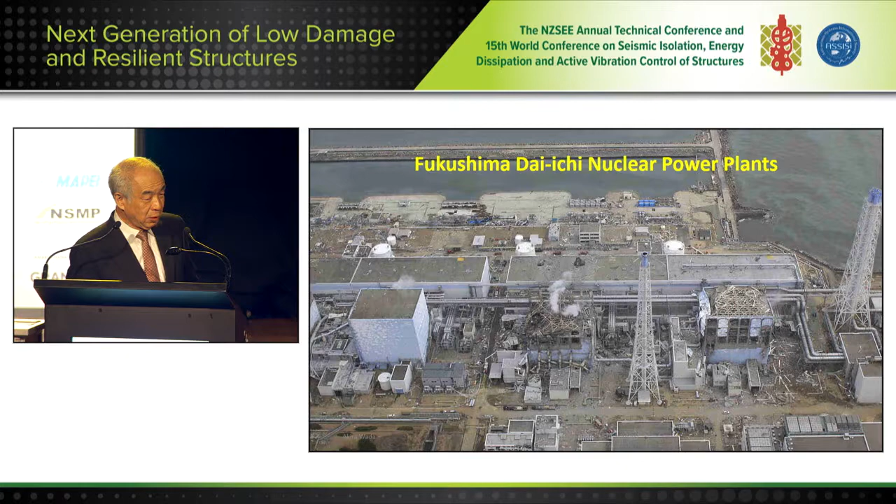Now more than 100,000 people cannot return to their hometown. What human beings did or do is always smaller than nature. But some people misunderstand that what human beings did is stronger than nature. This is a mistake.

There are many researchers and research fields - earthquake itself, active fault, building, or medicine - but we didn't discuss together over the fence. Nature is continuous, but human discussion has many gaps. This is the reason why the nuclear power plant broke down.

Let's start to discuss earthquake disaster from 1891. Japan opened to the world in 1867. Almost 23 years after Japan opened to the world, a very big earthquake hit around Nagoya city.

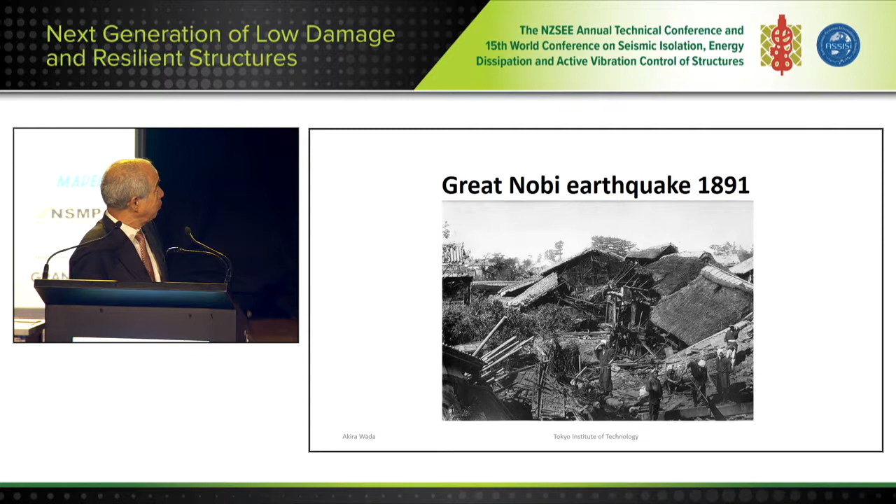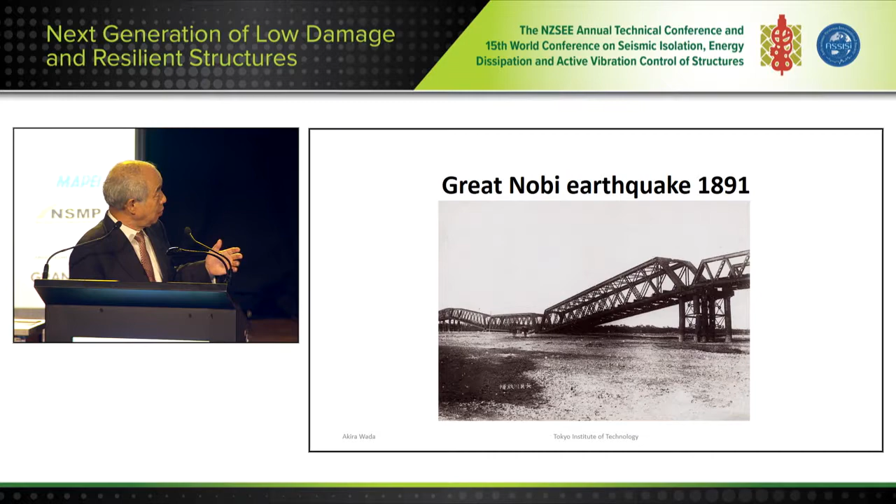These buildings and houses constructed before 1876 were very weak. And these bridges were designed by English engineers. But there is no earthquake in England.

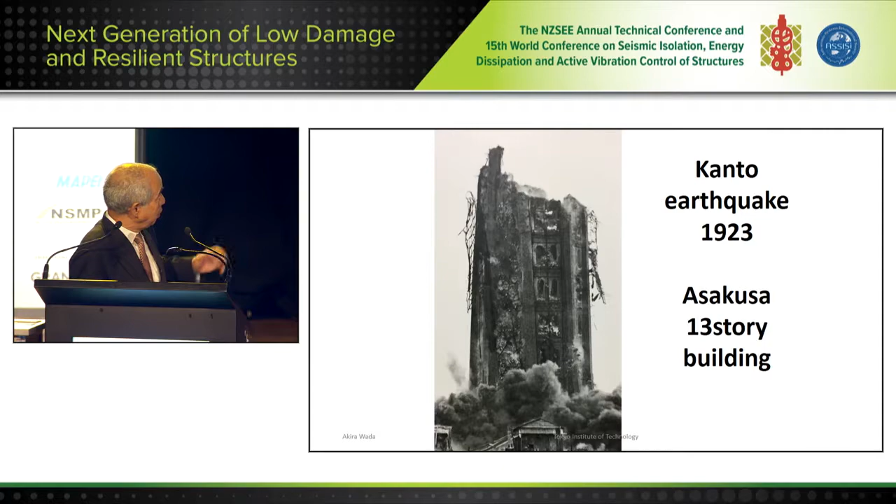In 1923, the Kanto earthquake hit Tokyo. Very severe fire came after the earthquake. Tall buildings of brick structure were very brittle. Many people brought their materials to the big park, but after that, a very severe fire came there.

All people were killed by the fire, and more than 100,000 people were killed.

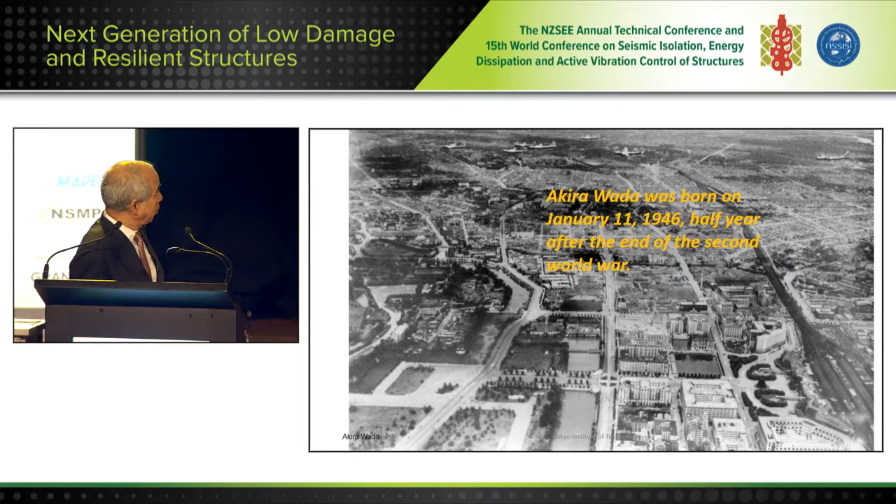I was born on January 11, 1946, half a year after the end of the Second World War. Almost all buildings were burned down by the Second World War. This war killed more than 3 million people. I think in China or other countries, more people were killed.

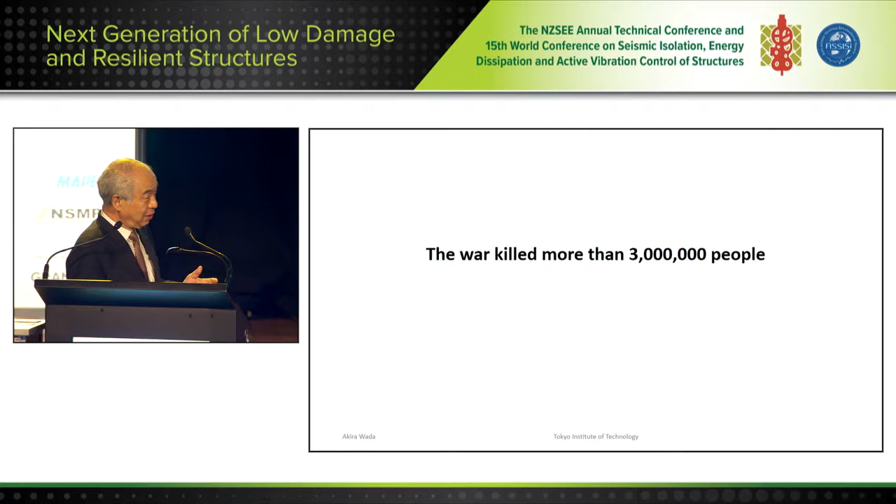Because of this I always say peace is important. 20 years after the Second World War, there was a strict rule that building height must be less than 31 meters. All buildings around downtown Tokyo were 31 meters in height.

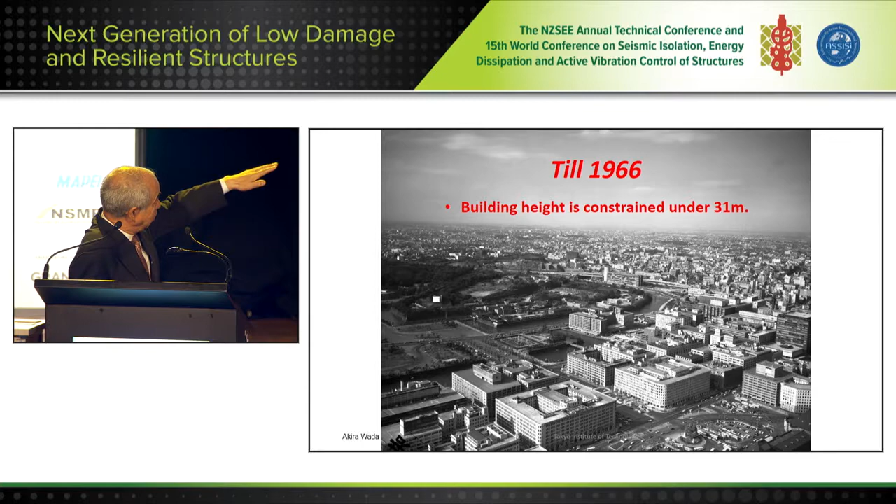In 1968, I was 22 years old. I graduated from university. The plate tectonics theory was approved, and the Tokachi earthquake happened.

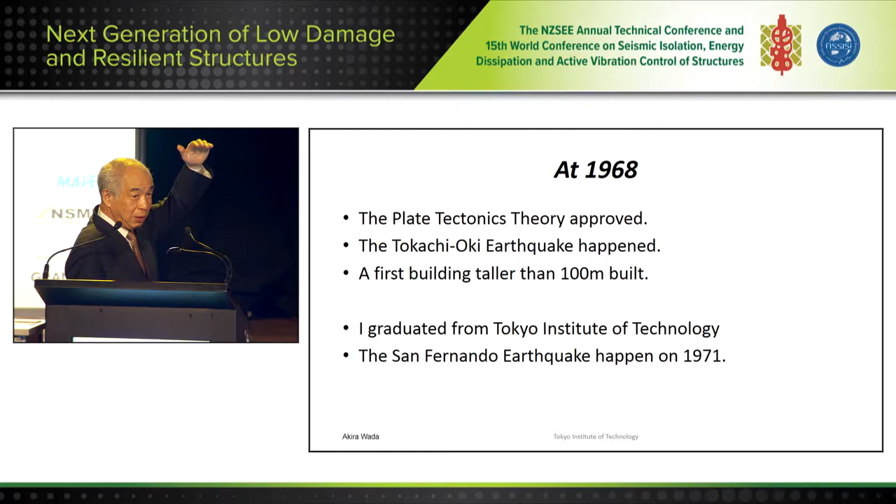There were many new reinforced concrete buildings built after the Second World War, but many reinforced concrete buildings collapsed. And the first tall building, taller than 100 meters, was constructed.

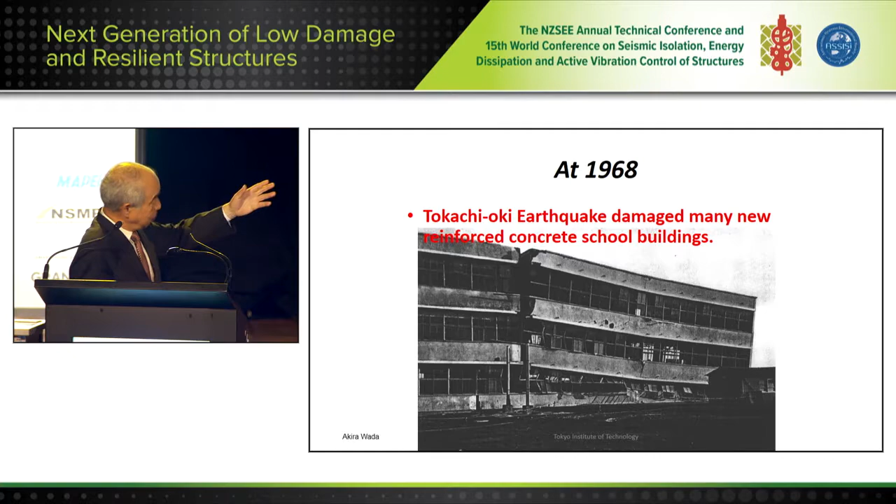The plate tectonics, as you know. This photo is not beautiful, but this building was very new at that time. But the hoop spacing - this distance is 25 centimeters. With very few hoops, shear failure happened in many buildings.

Also in the same year, the Kasumigaseki building was constructed. 1968 is a very important year in Japan, to me.

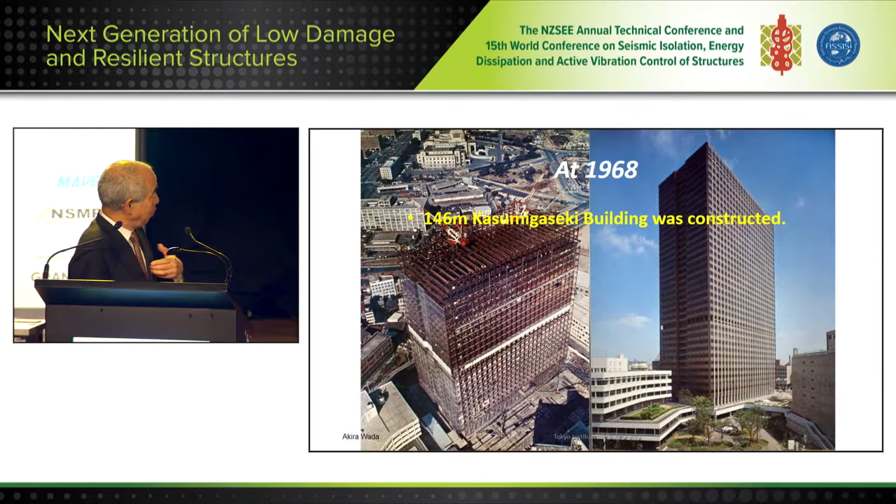Two years after I graduated from graduate school, I was a structural engineer at Nikken Sekkei, and our group developed this eccentric brace. Two or three years after that, Professor Takanashi visited University of California, Berkeley, and explained our research to Professor Popov.

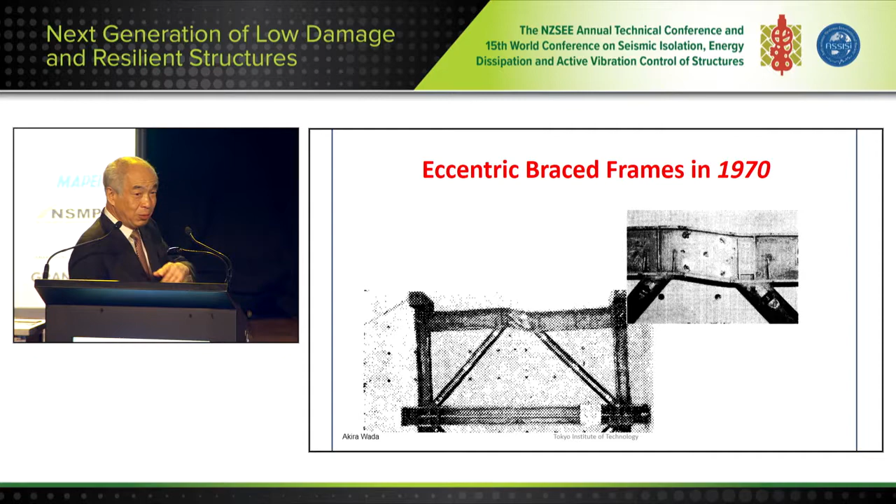After that, Professor Popov started this idea. I think none of them knew the original source - please remember this. The next year, the San Fernando earthquake happened.

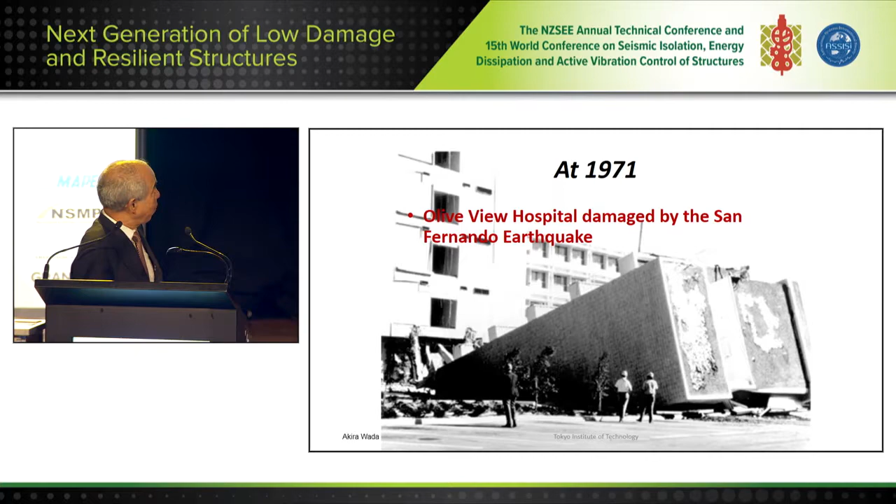In 1987, just 30 years ago, we developed buckling restraining braces with the engineers of Nippon Steel. This is the first set of 5 test specimens.

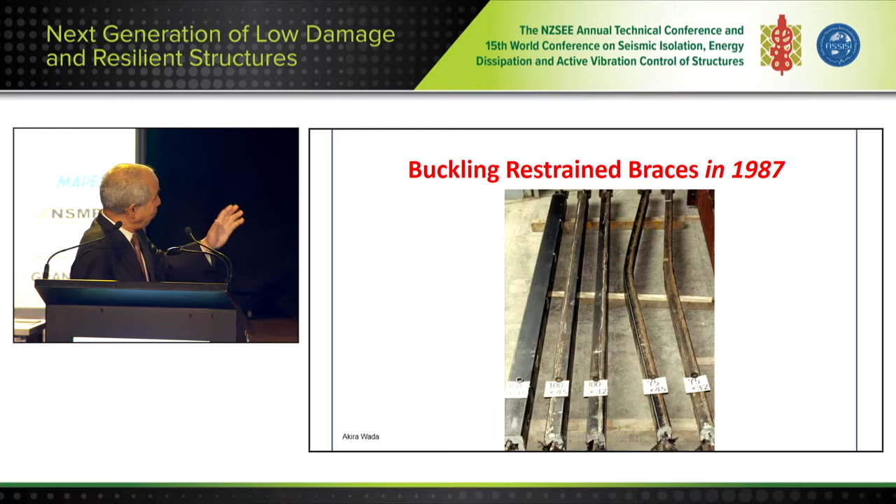The left side 3 specimens were not buckled, but the 2 on the right-hand side were buckled. The Euler buckling load is larger than the yield strength of the core member - 1.5 times stronger is okay.

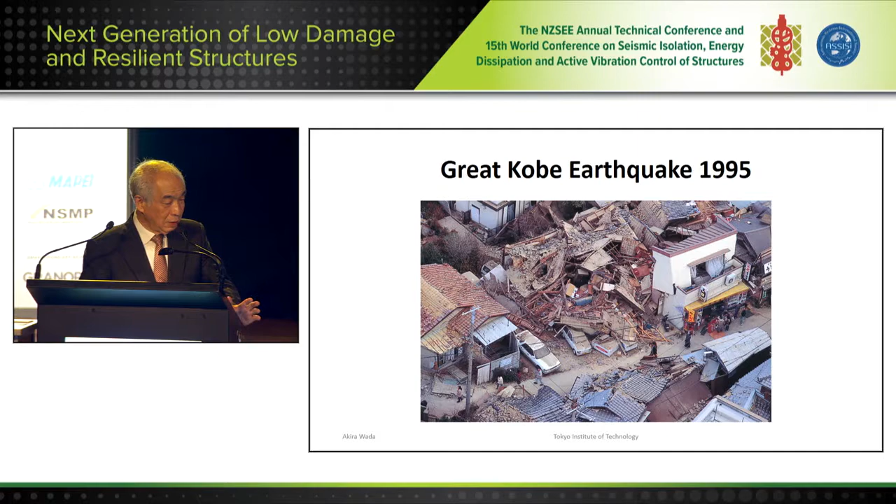Many old wooden houses were broken, almost same as 1891. And the reinforced concrete building, this building has no shear wall around the street, the torsional displacement.

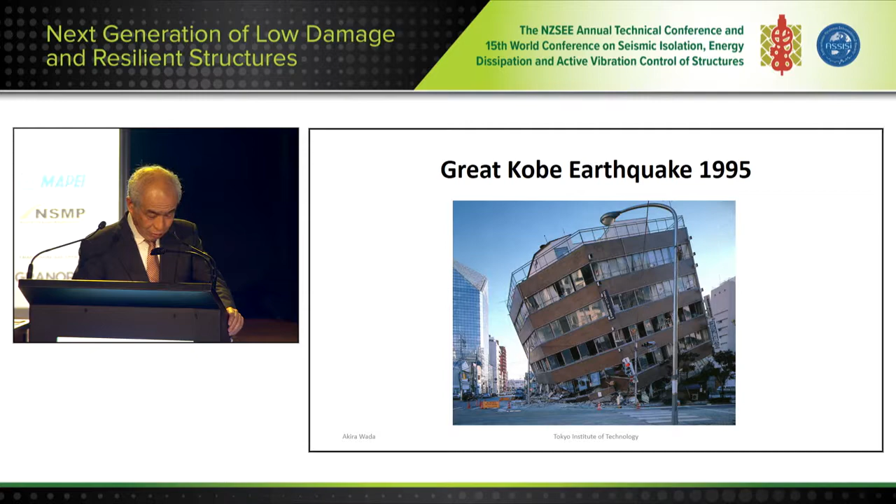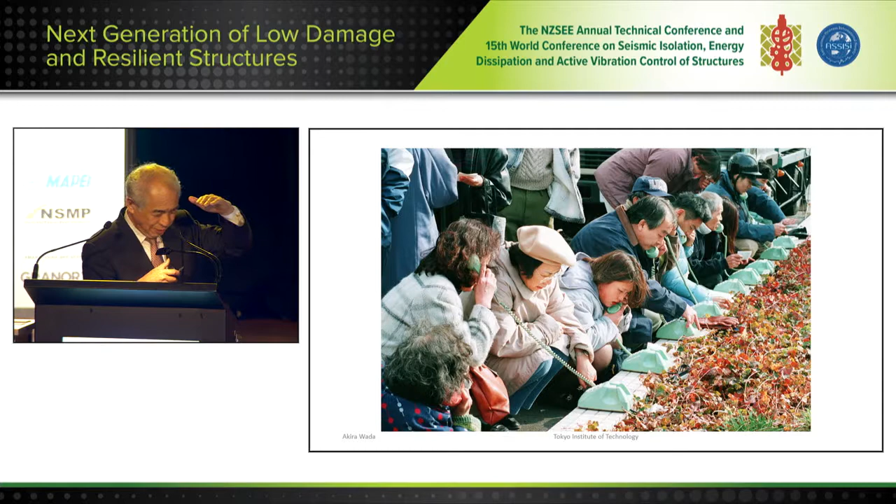And there are many brittle structures in Kobe. 22 years ago, almost all people did not have a cellular phone. The Japanese telephone company prepared a free phone; they called their relatives. But now we have cellular phones, traffic controls the telephone line, we cannot use it in the disaster area.

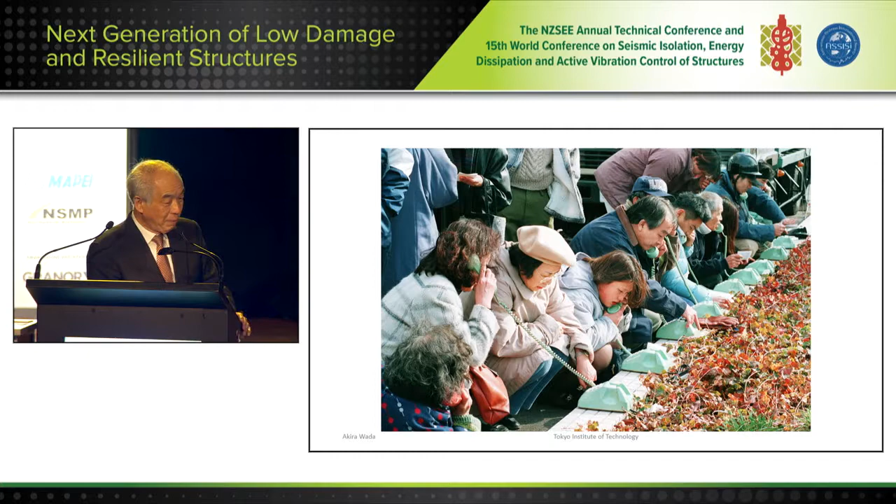And many garbage was produced by the earthquake. All trucks bring the structural materials.

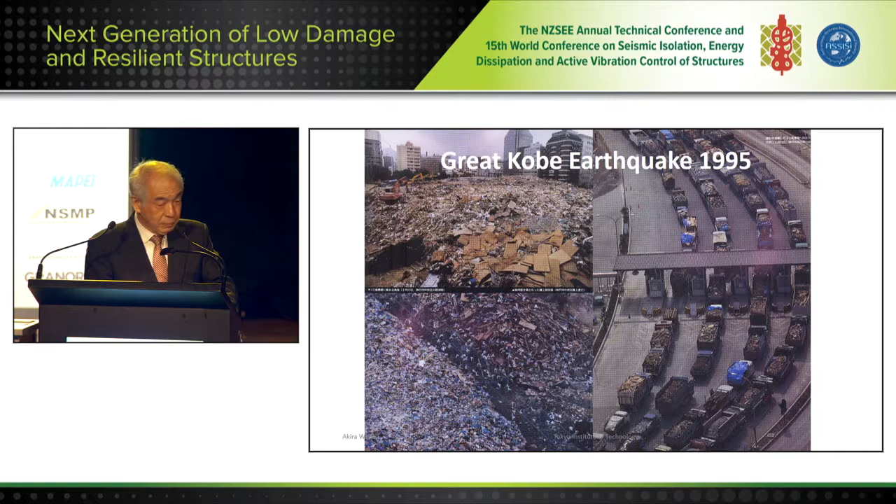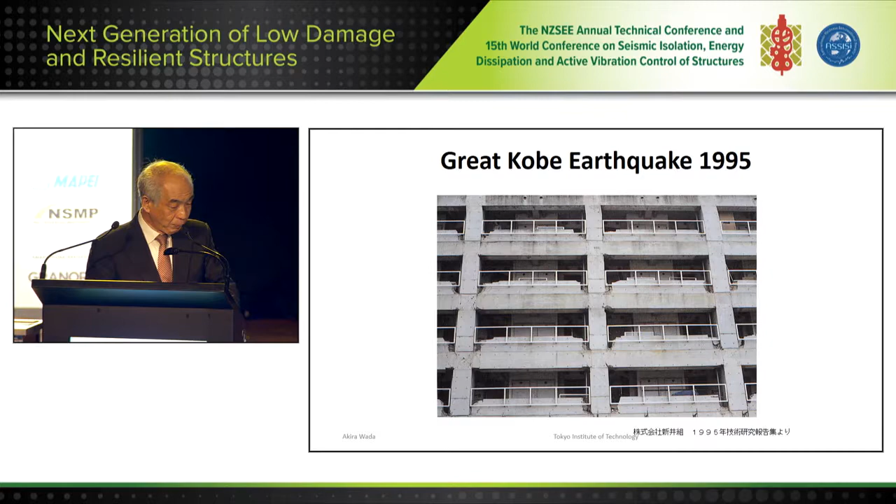This building, designed by the new design code, we changed in 1981, and this building is not so old at that time. You can see the bending crack, flexural crack, at both ends of the beam, and some X-shaped cracks in the joint. Second, third, fourth, fifth, sixth, seven. At the seventh is a roof beam, two beams and one column. So there is no crack in the beam, but crack happened at the top of the sixth-story column. And another story has many cracks around both ends of the beam.

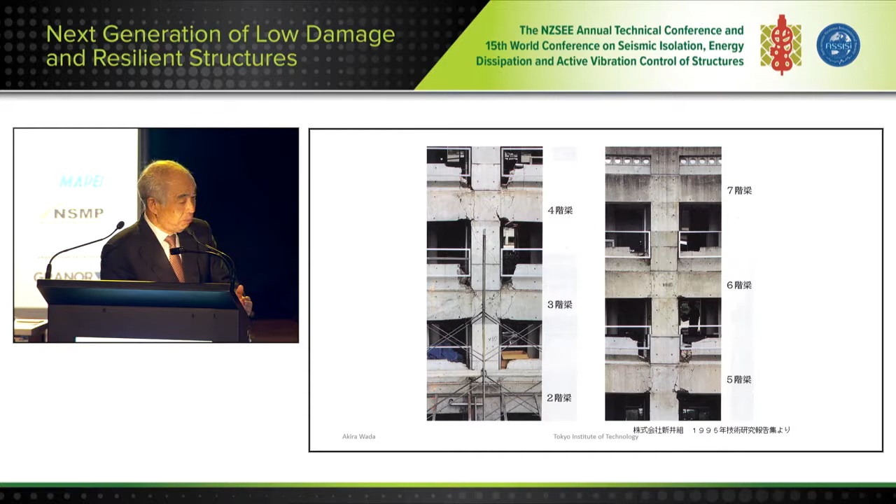This is expected by the researcher and the engineer. Perfect, no one killed by this building. But after that, they demolished this building, same as Christchurch 6 years ago.

And there are many buildings, some which have some damage, demolished. And the demolish money comes from the government. This is not a good system. If the owner has to pay the demolish money, they will make a more strong building. But in Christchurch, the insurance company pays, while in Japan, the government pays.

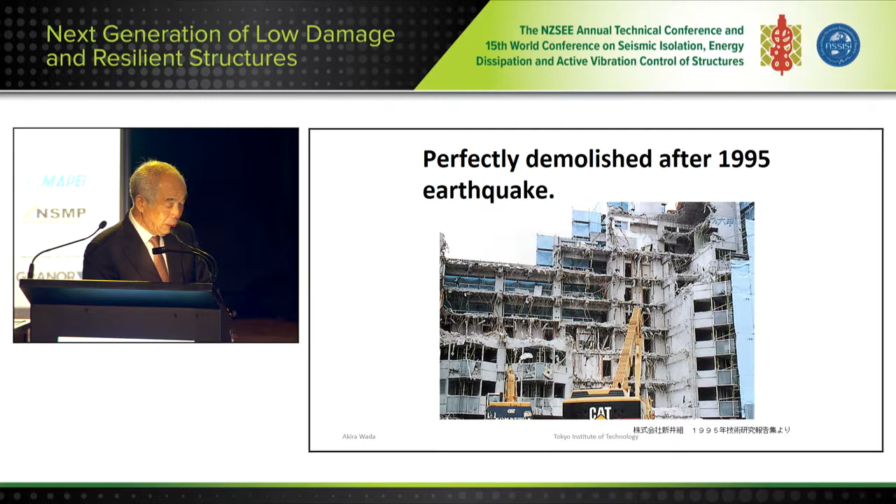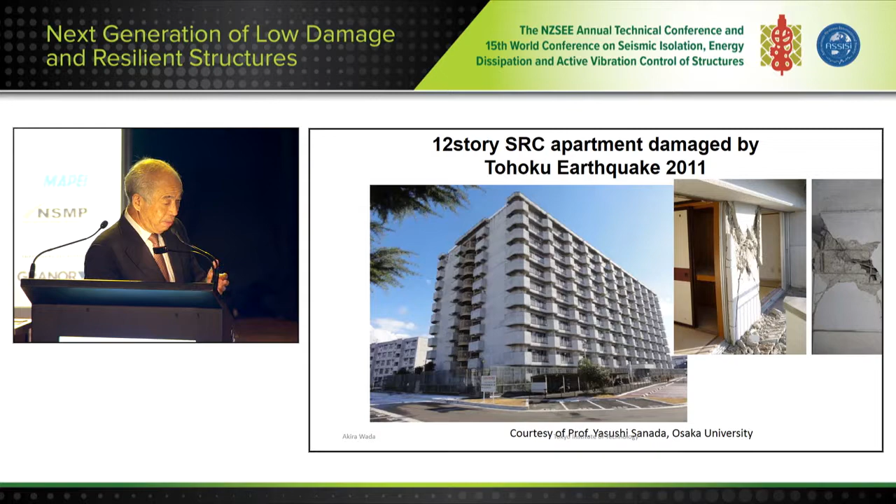During the earthquake, there was a very large sound. They don't want to leave this apartment after the earthquake. Professor Sanada checked all cracks around the building. X1, X2, X3, there are columns. Between X1 and X2, this is a little wider than the column depth. This is a non-structural wall. The non-structural wall has not much reinforcement, and it's a little wider than the column.

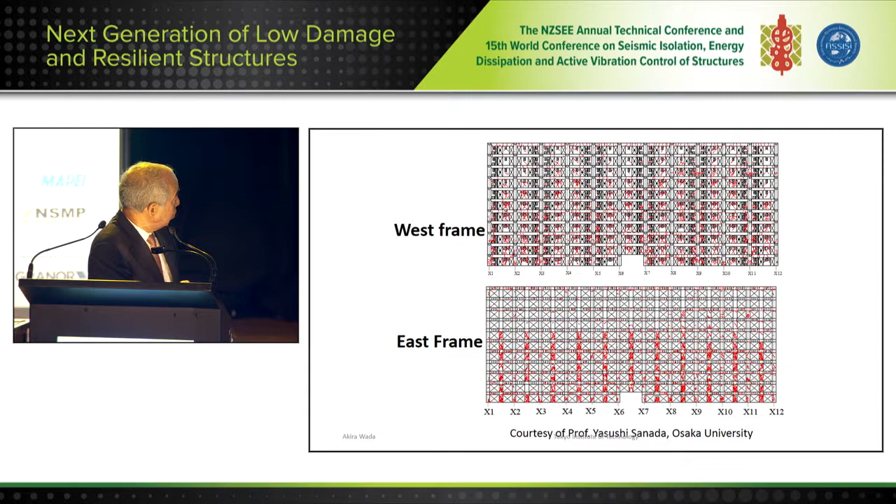Many cracks from the first, second, third, fourth, fifth, sixth, seventh story, but the column, from the first to third story, and there are many cracks in the beam - weak beam and strong column structure. In the west frame, there are many complicated non-structural walls with many cracks.

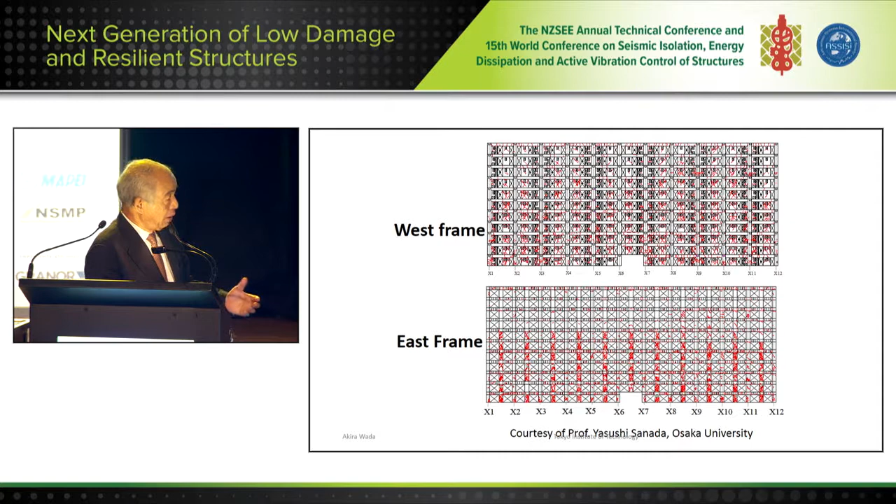And after that, this building was also demolished. The owner is Sendai City. Sendai City paid - this is okay. Sendai is about 400 kilometers north of Tokyo.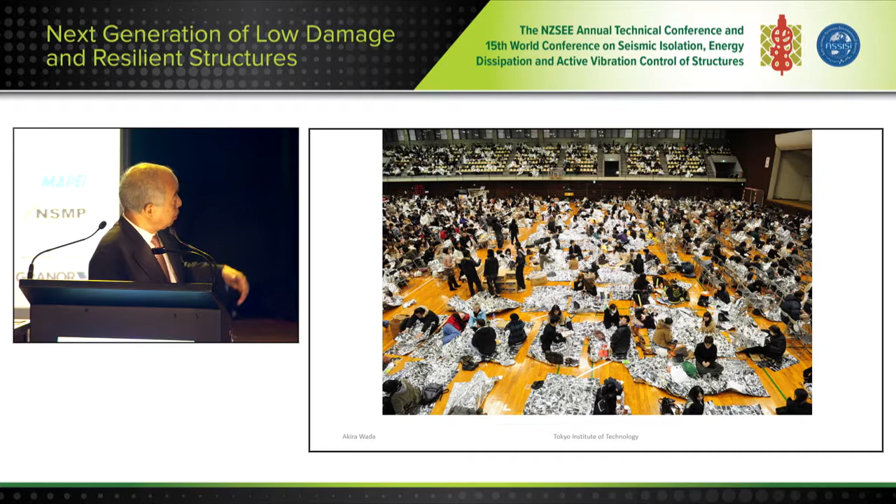This fire happened very close to Tokyo, very dangerous - an oil factory. And in Tokyo, many people were working, and they wanted to return to their houses, but many traffic and train systems stopped. They stayed in a gymnasium of the university. About 20,000 people were killed by this earthquake.

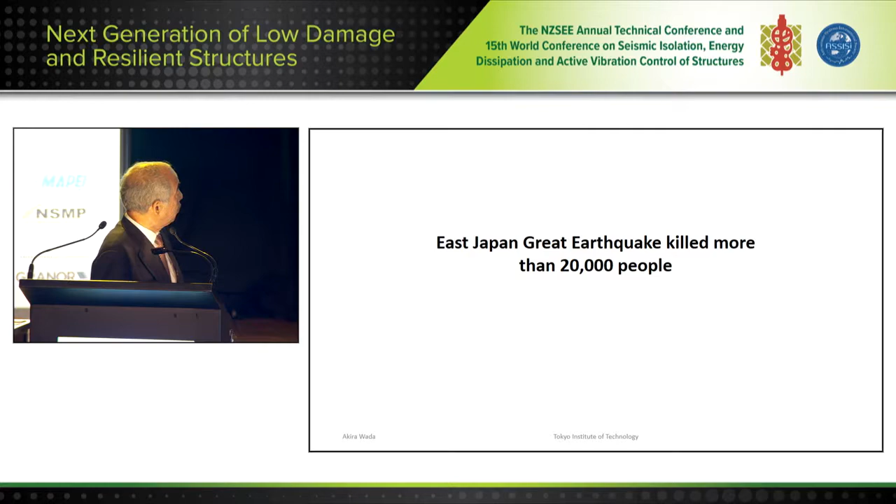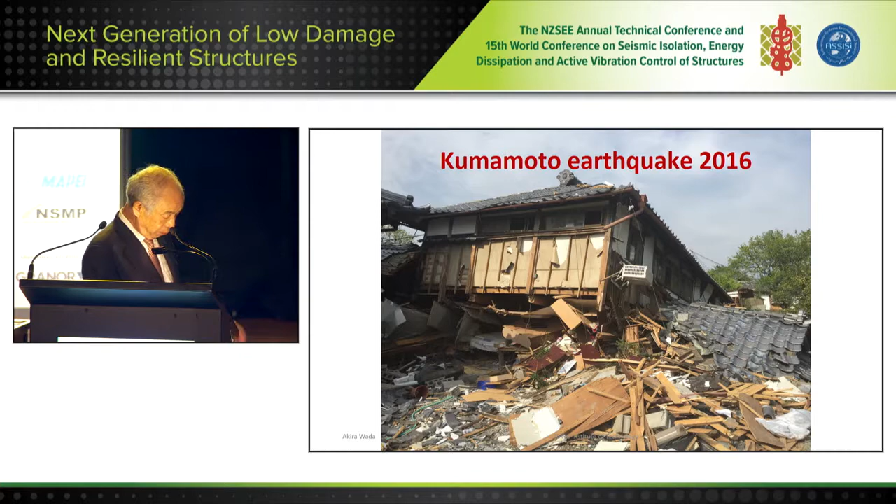Just 1 year ago, in the southern island of Japan, Kyushu, the Kumamoto earthquake happened. About 200 people were killed by this earthquake. I showed the wooden structure that collapsed in the 1891 earthquake, 130 years ago. But just last year, a wooden structure was broken, and a reinforced concrete city hall also broke.

This is a hospital with shear walls, not so big cracks, but the doctors and nurses didn't know if this crack was okay or not. This hospital has 300 inpatients, but patients don't like the furniture falling. So the doctor decided all 300 inpatients should be moved to another hospital.

Yesterday and the day before yesterday, you discussed not only structure but also function. But function will be okay, yet the people don't like to stay in this hospital. This is after they refused.

Two of them cleared the bed, but one person did not like to stay there. He refused just after the earthquake, did not clean up the bed. If you are in a hospital and an earthquake comes, please clear the bed and take it out from the hospital. This is a manner.

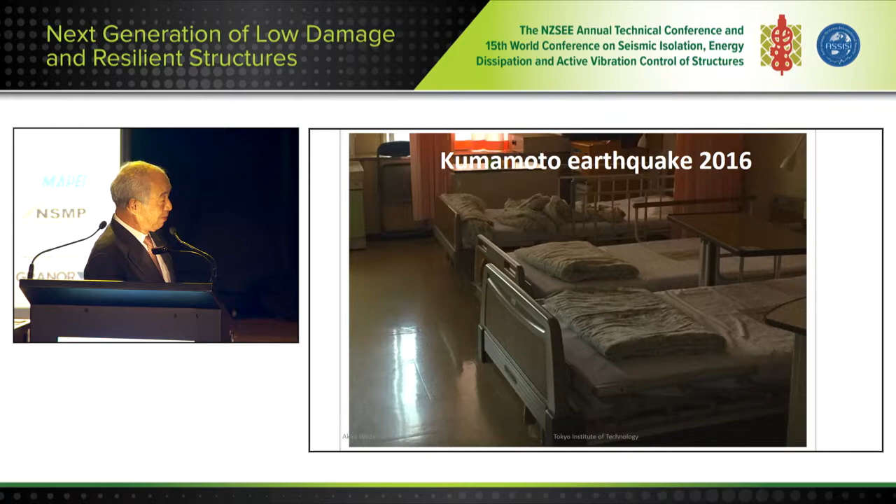And the next earthquake will come to Tokyo. When magnitude 7.1 or 7.3 comes, more than 23,000 people will be killed, and the collapsed buildings will number 610,000, and the total damage is 95 trillion yen, and the people who find it difficult to return home will be 8 million. I think the population of Christchurch is smaller than 8 million.

So, very... I cannot believe why many people are living in Tokyo.

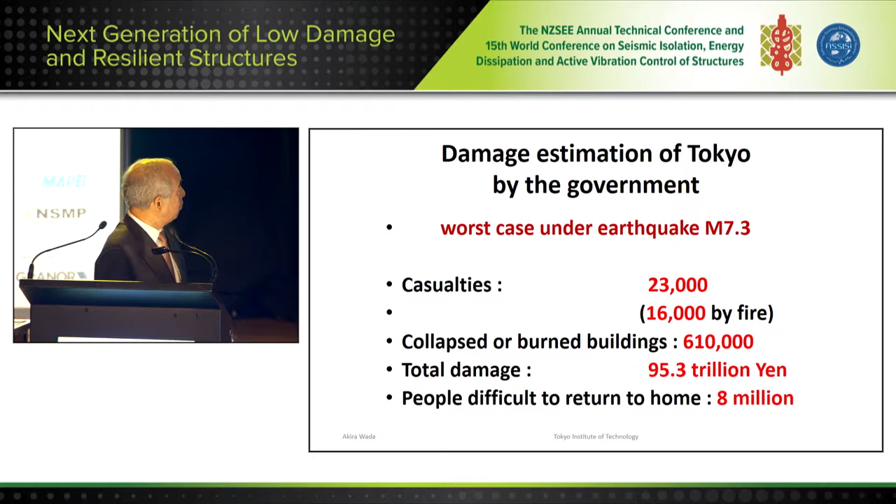Dark in the night. But in Tokyo, many people are living, and after the earthquake, electricity will stop. It becomes a perfectly dark city, very dangerous. There are many buildings, but not all are perfectly okay.

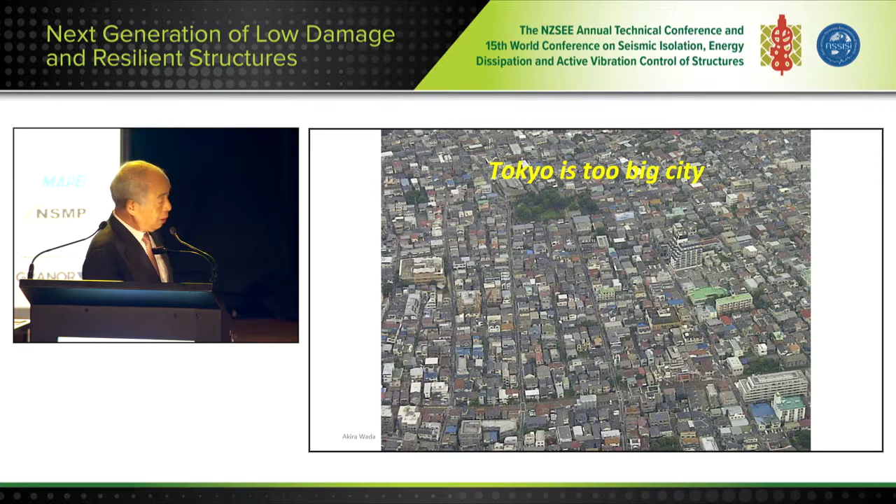And in the daytime, there are many tall buildings and the river. Sometimes it's not a big tsunami, but the tsunami will come.

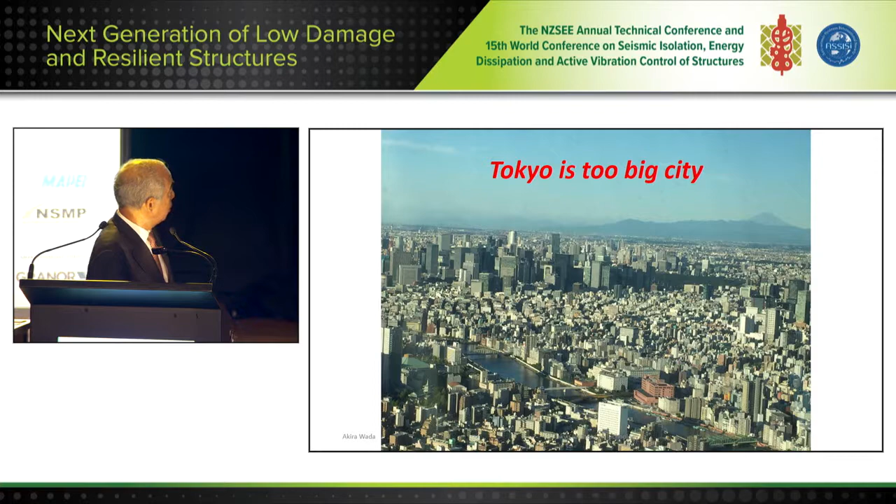But our seismic design procedure only ensures human life is safe. The building cannot be used after any repair. They want to demolish the damaged building, with no continuous use. But we cannot make our city sustainable and resilient against a big earthquake. We need to change our seismic design concept.

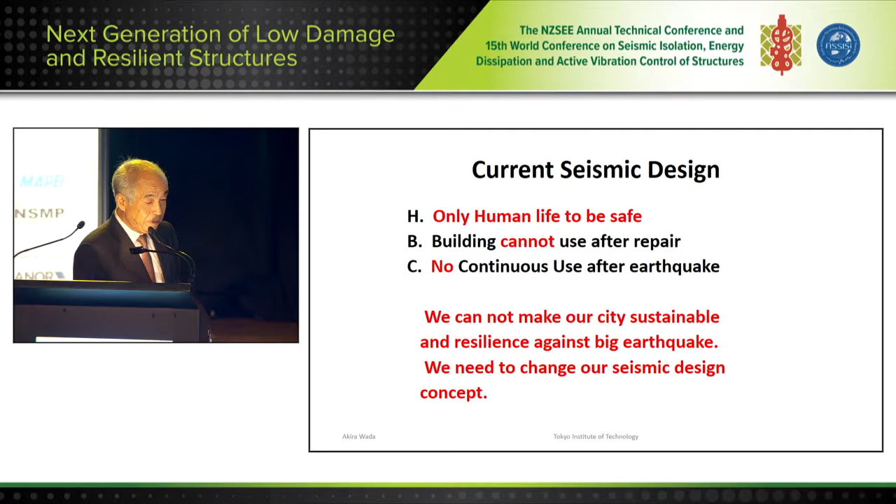This photo was given to me by Professor Steve Mahin, but Steve Mahin picked up this photo from the internet, so this is not legal. It's designed to protect life in an extreme event, but the damage is expected. The car design concept is okay this way: human life is okay, and he can buy a new car with the insurance money.

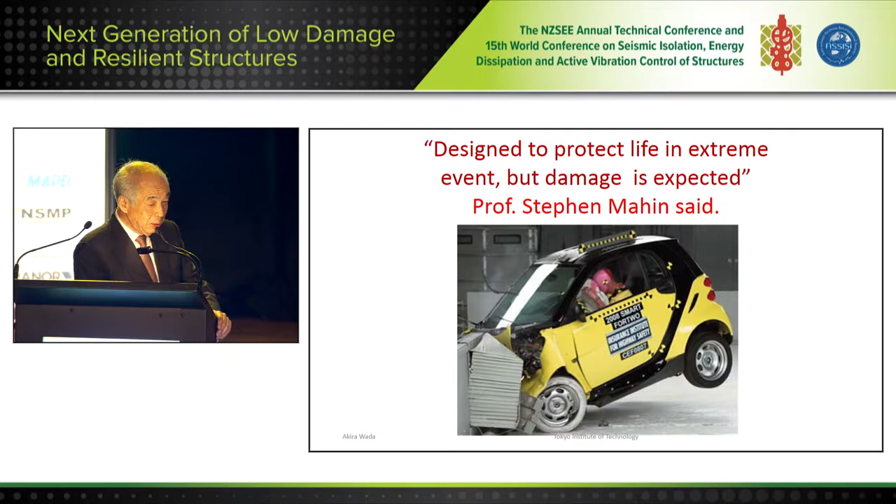But our seismic design concept is almost the same as a vehicle: protect life in a severe earthquake, but damage to so many buildings is expected.

Christchurch is the same situation. Two-thirds of the buildings were collapsed or demolished. I think this procedure is not good.

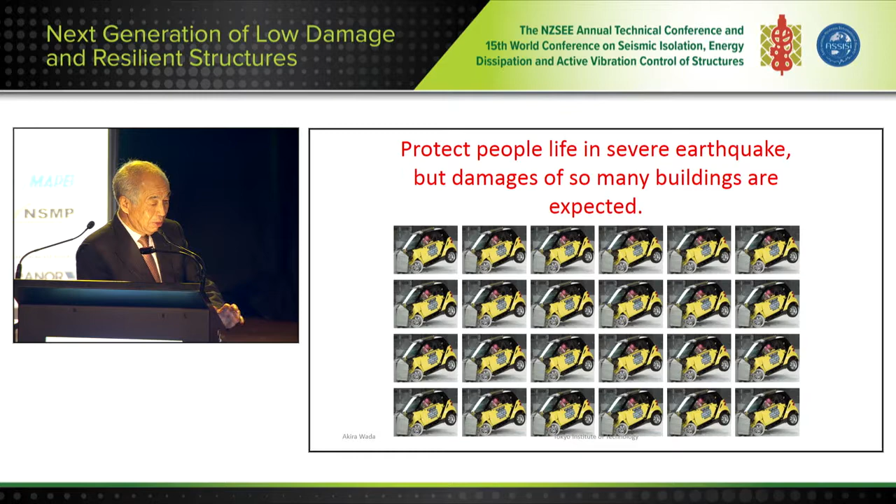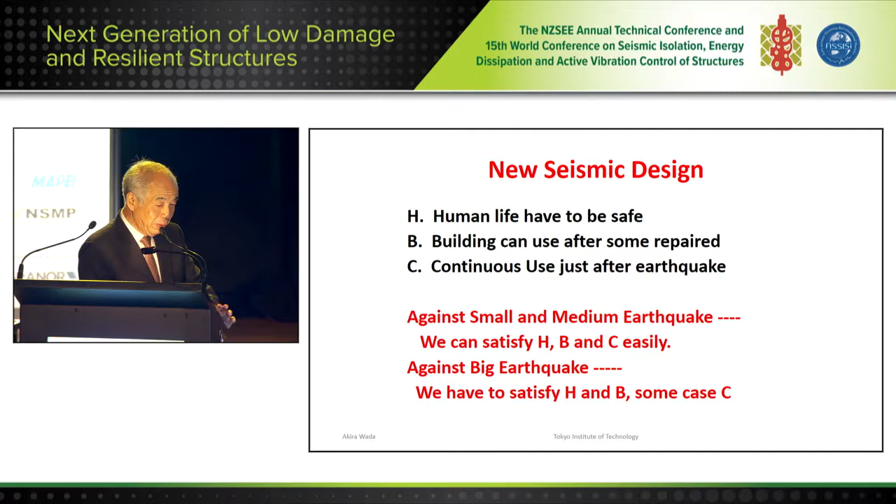Next, the new seismic design: human life has to be safe, that's okay. But the building can be used after some repair, with continuous use just after the earthquake for some buildings. Against small and medium earthquakes, H, B, and C easily. Against a big earthquake, we have to satisfy H and B. In some cases, we want to satisfy continuous use.

And we have many new technologies just discussed in this conference: seismic isolation, passive control, stepping columns, and the elastic joint of precast concrete structures. In this conference there are many new young researchers, and they will make even better systems.

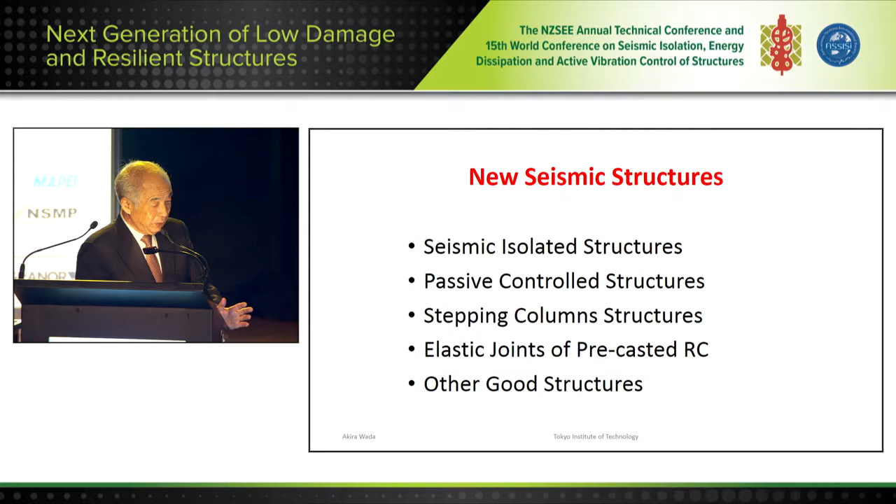1,300 years ago, the Shosoin was built. This building is supported by 40 timber columns. These columns stand on large stones, and the column does not go through the building, it stops beneath the building.

The height is 2.3 meters, and the diameter is about 60 centimeters, and the stress on the column is very small. When an earthquake comes, the column rocks like this, and the superstructure will move in any direction, almost the same as a friction pendulum.

And in these 1,300 years, there has been no earthquake damage. This is one of the originals of seismic isolation.

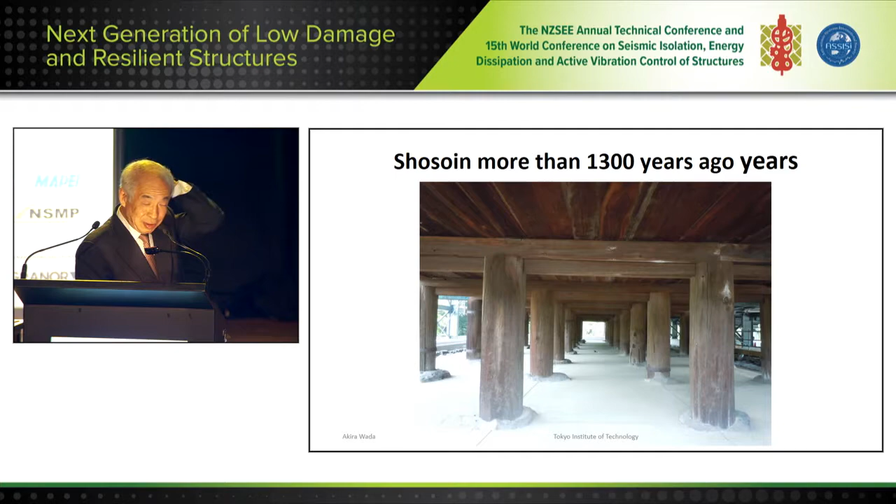The day before yesterday was about the history of seismic isolation, which is older than this. But 1,300 years ago there was no internet, so this carpenter didn't know what the Turkish people or Iranian people did. I think all this technology was original.

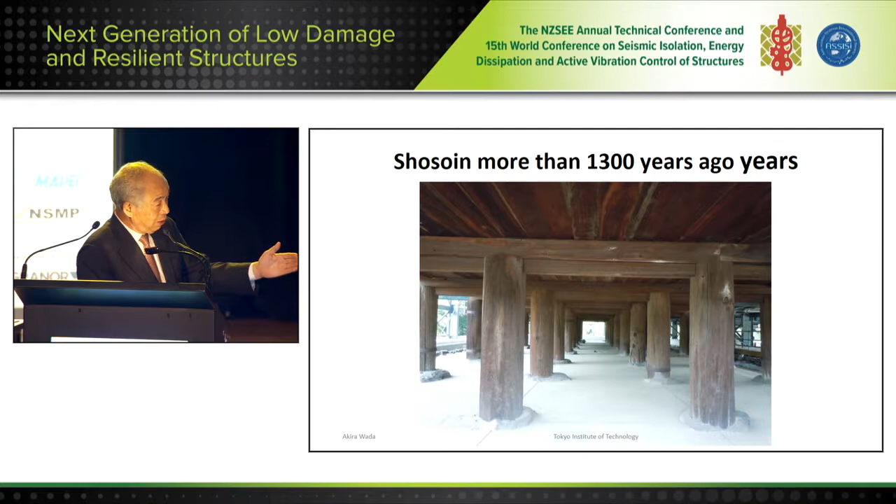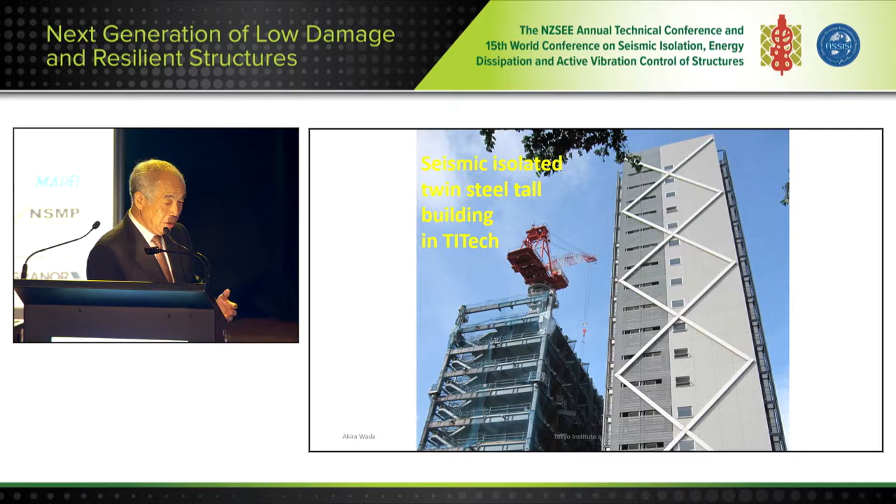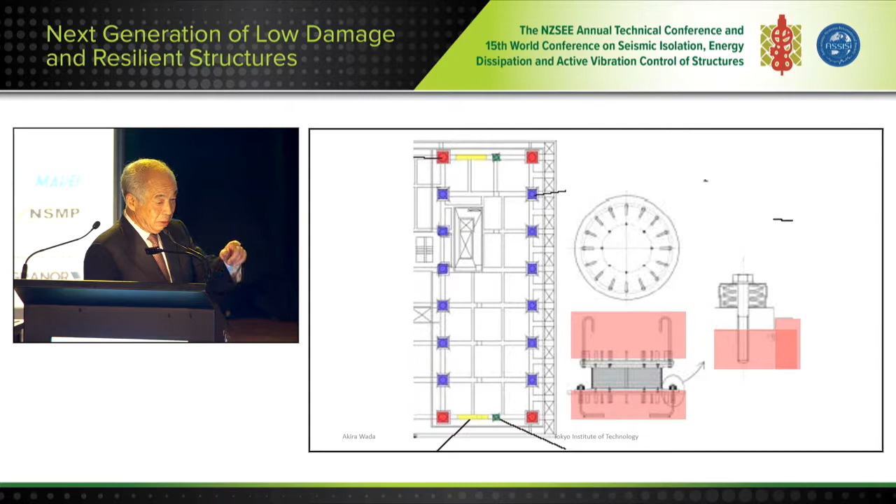When I retired from our university 6 years ago, just before retiring, Professor Toru Takeuchi and I designed this 20-story steel building on a seismic isolated system. There are 16 isolators, and at the 4 corners we use a stepping system. 6 years ago, during the Tohoku earthquake, we recorded the stepping occur only one time.

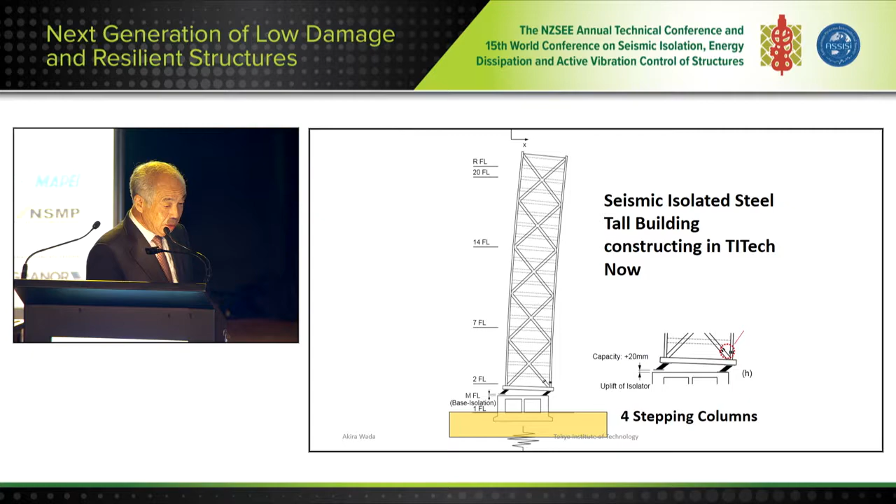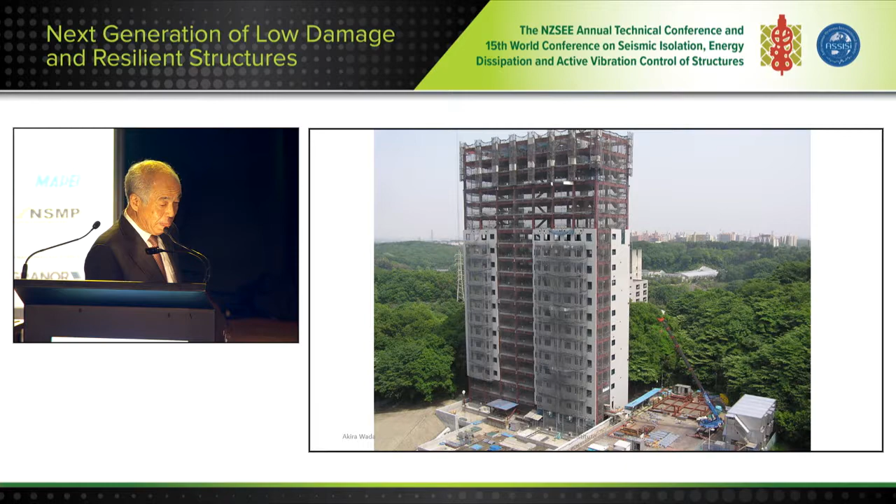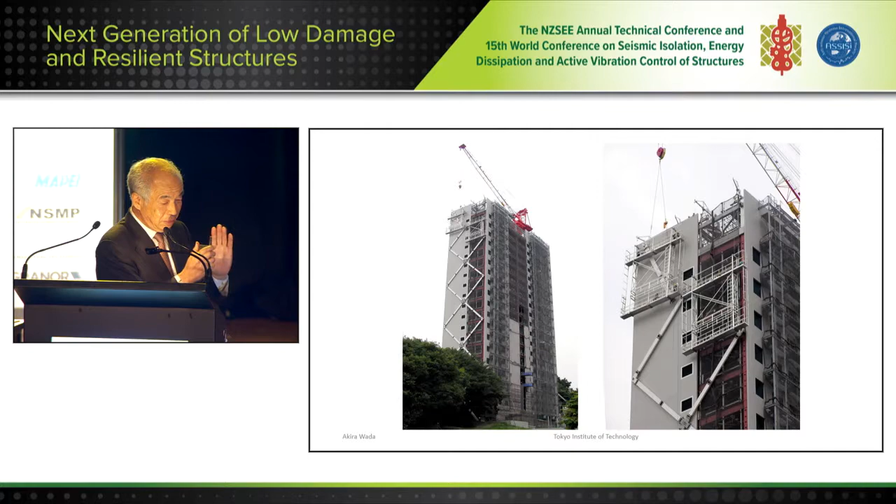This is under construction, a very slender tall building on a seismic isolation system. There are many steel braces, but this is not a BRB. This brace is for the stiffness of the structure, and it is very large. You can see 5 or 6 workers next to it.

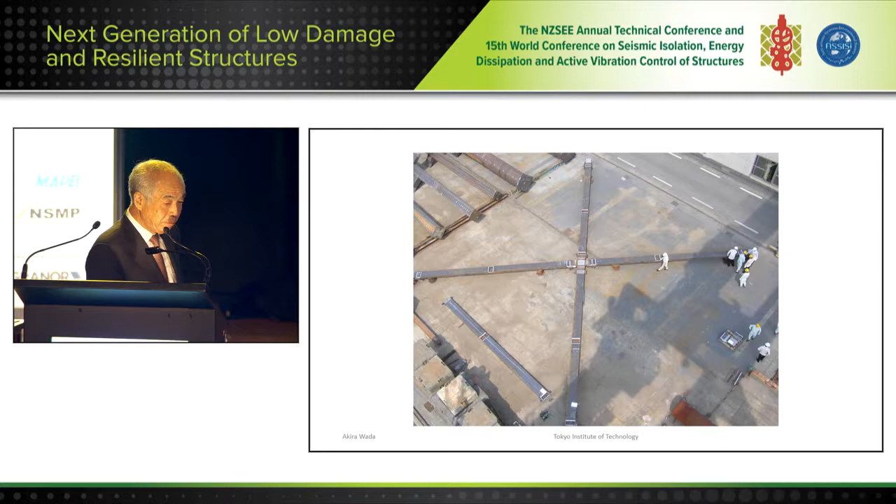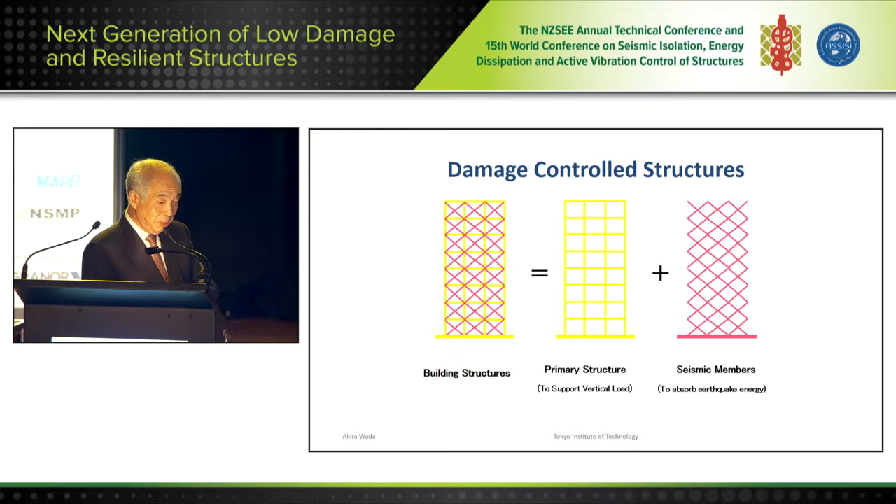Many engineers and researchers discuss in this conference damage-controlled structures and passive control structures. But I wrote this figure in 1991, 3 years before the Northridge earthquake: the primary structure must stay elastic, plus seismic members, and we can use BRB or other damping systems.

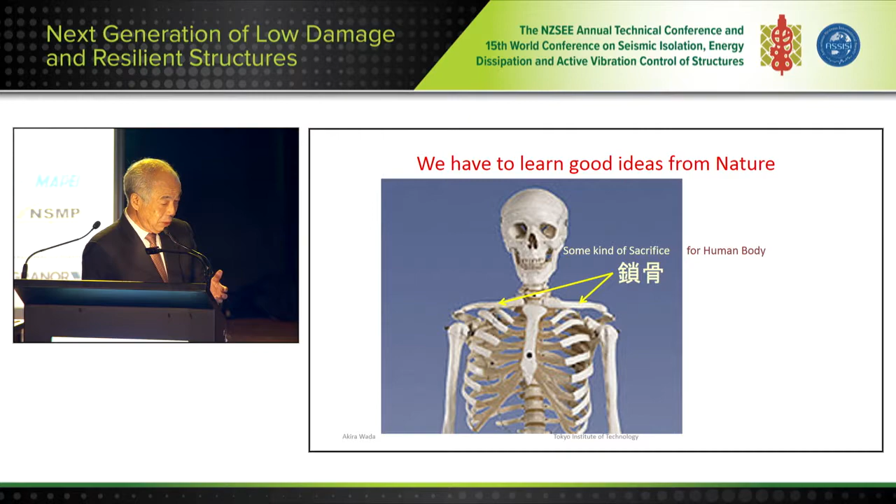I don't know the name of this bone, but when the young boy broke this bone, his life was okay. This is some kind of damping system, a sacrifice of the human body, the same as the bumper of a bus or the fuse of a personal computer.

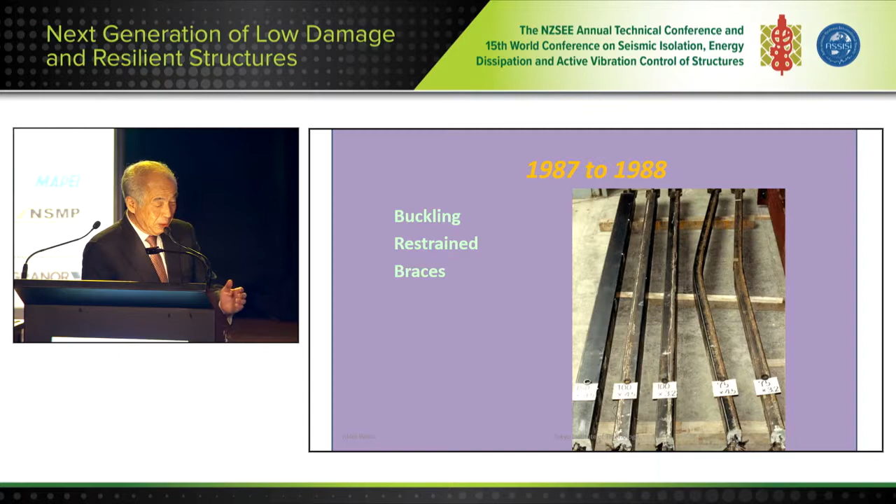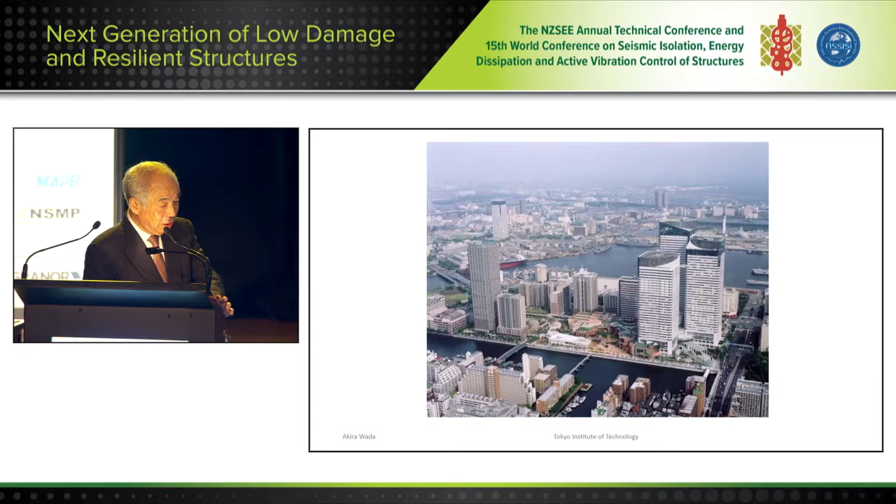As I already explained, this BRB is very good as a sacrificial member. We started to design the right-hand side 3 buildings before the Northridge earthquake, starting in 1990. There are many BRBs around the building, under the perimeter frame. At that time we called it an unbonded brace.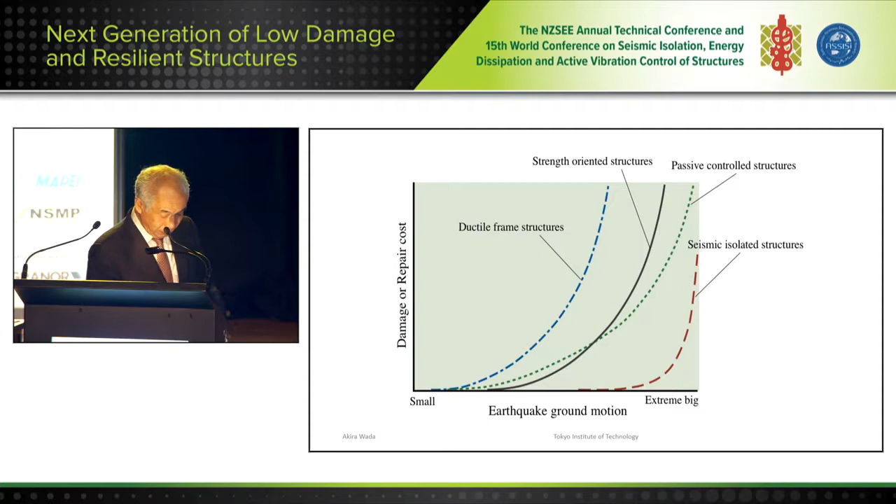And the seismic isolated structure: if a very big earthquake comes, some damage will happen. There are many buildings downtown; if all buildings were designed as ductile frame structures, in Japan where seismic intensity 7 is the maximum, many buildings will have some damage.

If all buildings were designed by strength-oriented structures, a small number of buildings will have damages. Ductile frame is more... not good, but the strength-oriented is a little good.

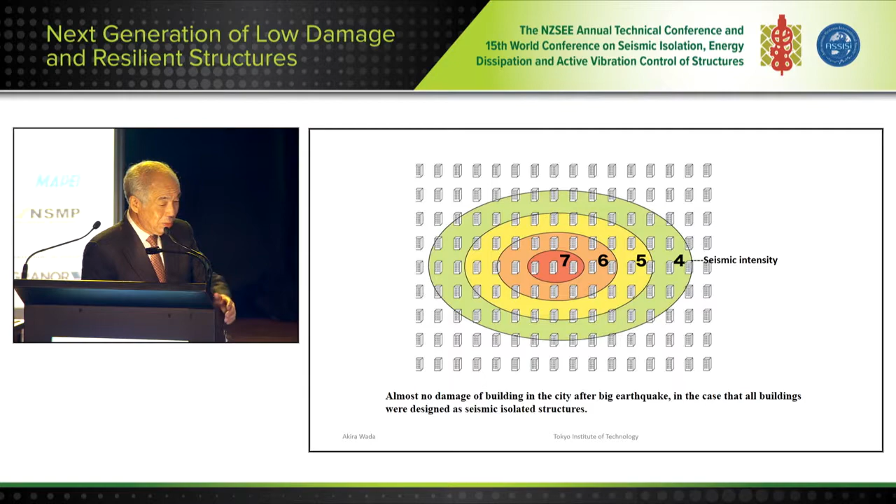If all buildings were designed by passive control structures, for seismic intensity 7 or 6, some of them we have to change with new dampers, but many buildings will be okay. This is a little optimistic, but if all buildings were designed with seismic isolation, all buildings will be okay. But there will be some not-good, poor engineers who design seismic isolation buildings, and some of them will have some damage.

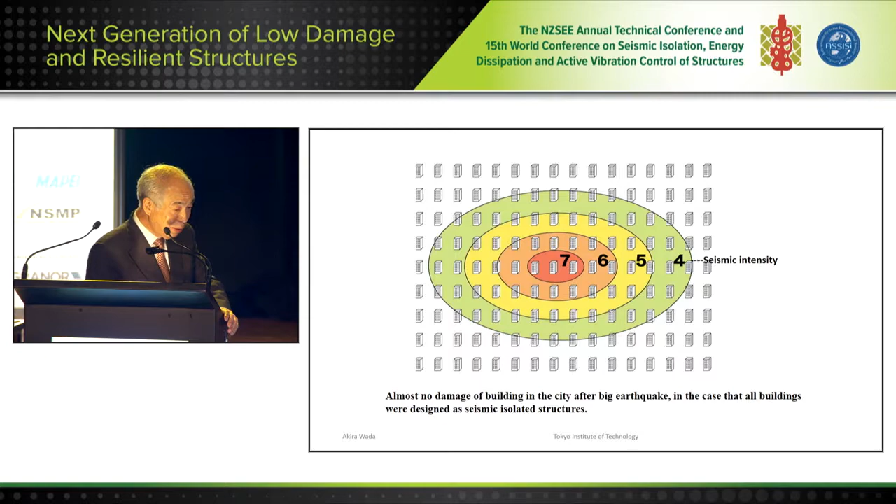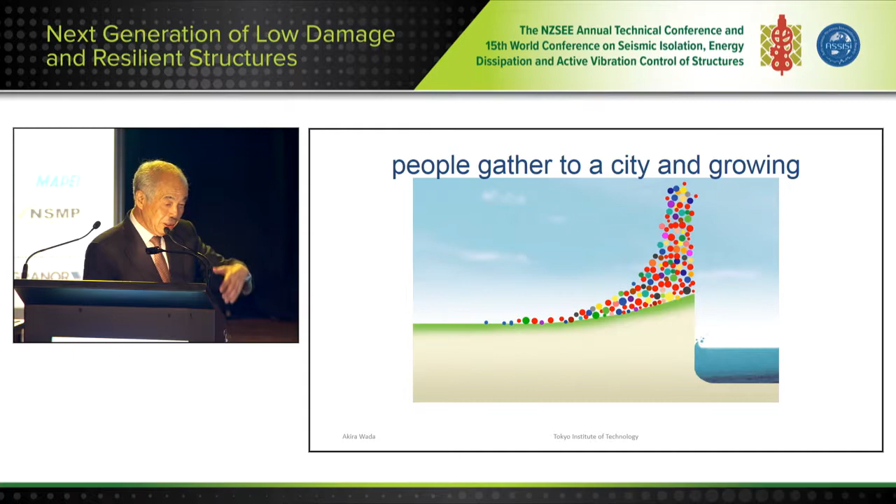More than 400 years ago in Tokyo, very few people were living there. Every 50 years, more and more people came to live around Tokyo. And when a big earthquake comes in the next year or 30 years in the future, many will be killed by the earthquake.

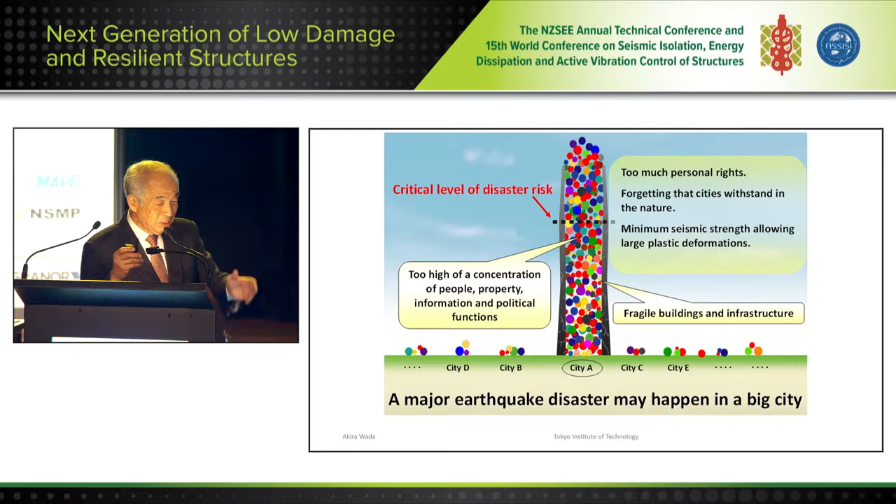There is too much concentration in the big city, but the buildings and the train system are not perfect—very fragile—and there are too many personal rights issues, so this is not a good system, I think. People have to return to their hometowns, and the big city has to be made stronger.

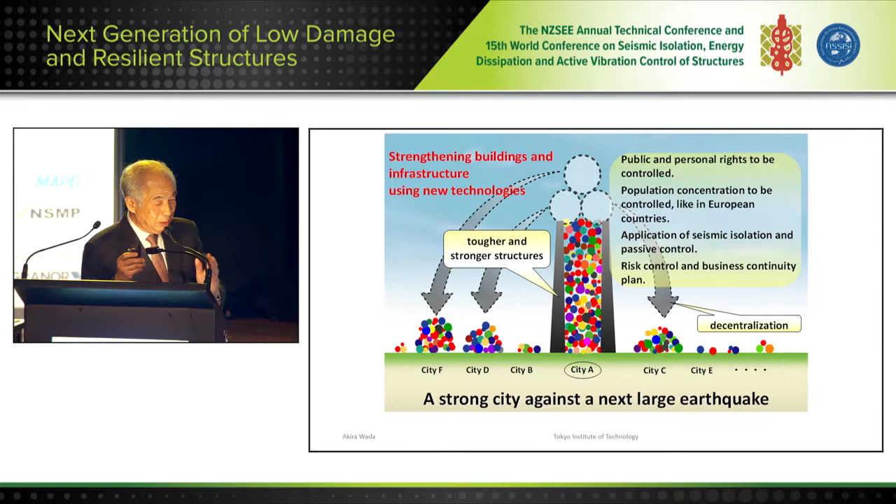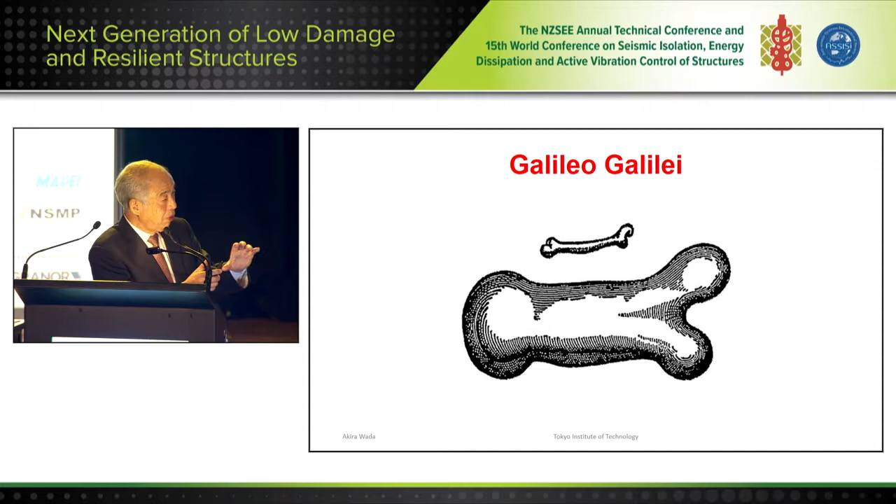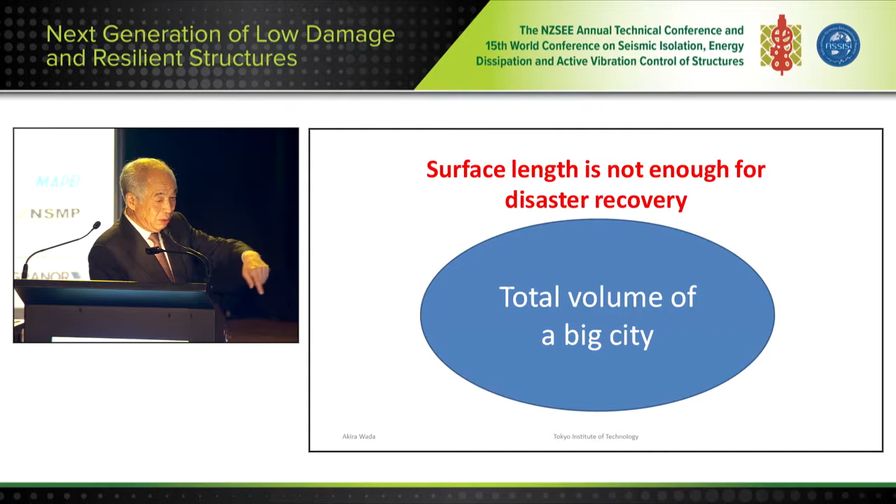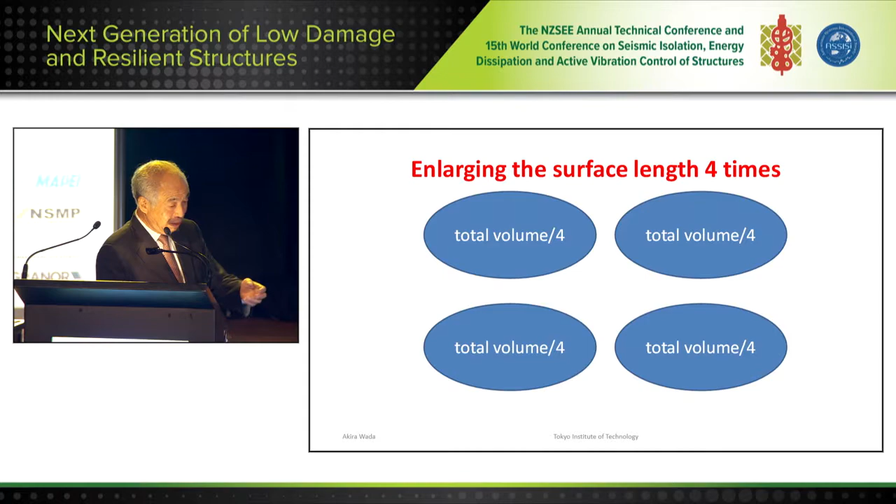When we make a big city, the total volume of the big city is very large, but the surface length is like this. If we divide Tokyo into 4 smaller cities, the surface length can increase 4 times. Just after an earthquake, we need water, food, and many things, so the surface length is very important.

For a sustainable and resilient country, we have to spread out all around Japan. As you know, Japan is a very beautiful country, like New Zealand. But around Tokyo, there are 35 million people—1/4 of the population living in Tokyo. It's too concentrated, I think.

I am 71 years old. When I was just 5 or 6 years into my career, Professor Tom Paulay had a sabbatical leave and was staying at the University of Tokyo. I studied under him the capacity design method. And before him, Bob Park—I bought his book—and Nigel Priestley, I met at the University of California. I respect these 3 famous professors. I am very happy to present here. Thank you very much.

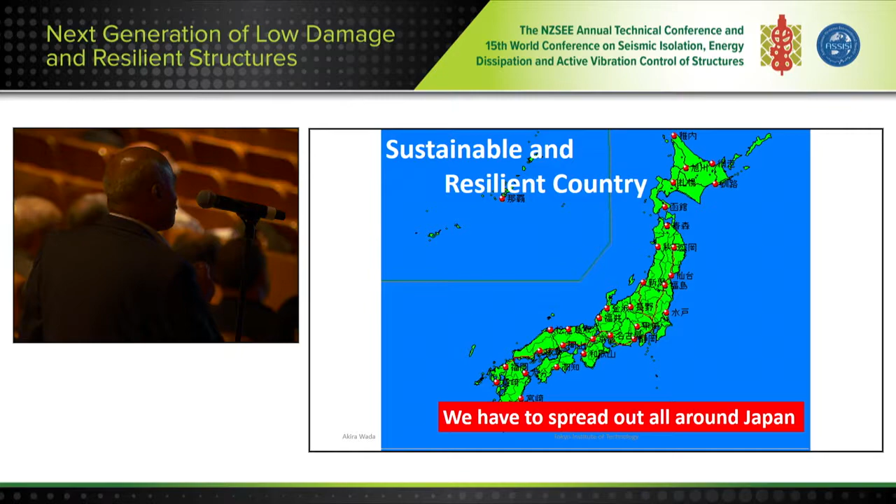Thank you. Yes, I agree with you. Before I came here, I checked the dictionary. Many people like a fire, but I want to bring a wet towel to the fire. Japanese people—when there was no earthquake damage in Tokyo for almost 93 years—but I bring a wet towel to the policy people. So do you think there is a discussion in Japan about changing urban planning or thinking? No, it's not happening. Developers make tall buildings on reclaimed land. They like money.

There will be so many questions we could ask about enforcement in Japan, for example, of existing building retrofitting. Do you have a compulsory, mandatory law to assess and retrofit buildings to improve them? I think in almost any city, not only Japan but also New Zealand, just after an earthquake the road street system is very important. But on the main street there are many old buildings in Tokyo, and if a building falls down, the traffic system cannot function. So in Tokyo, buildings standing on the main street must be retrofitted.